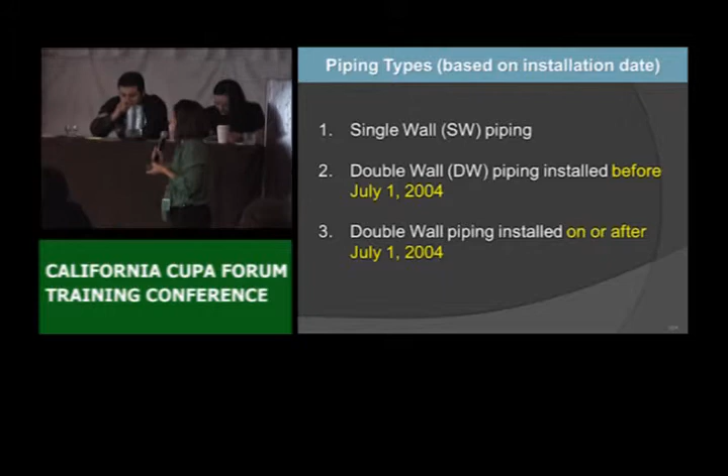Okay, so once again, I based these designations on installation date. So we have your single wall piping. I'll discuss monitoring alternatives and construction with those tanks, I'm sorry, piping. Double wall piping that was installed before July 1st, 2004, and then your double wall piping installed on or after July 1st, 2004. Like I said, when we address the post July 1st, 2004, we're going to be talking about tanks and piping.

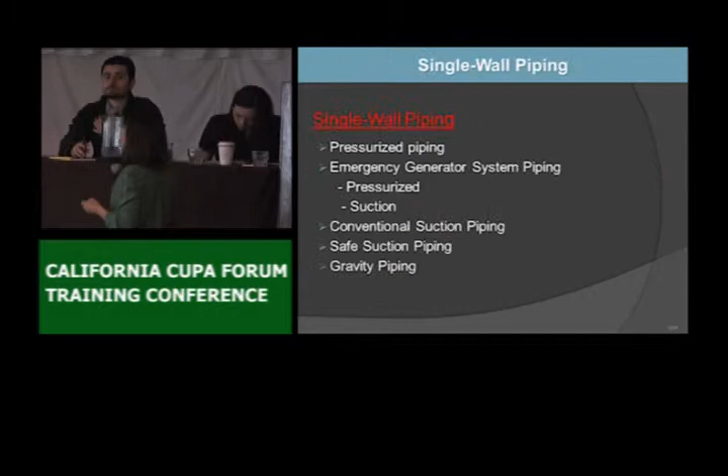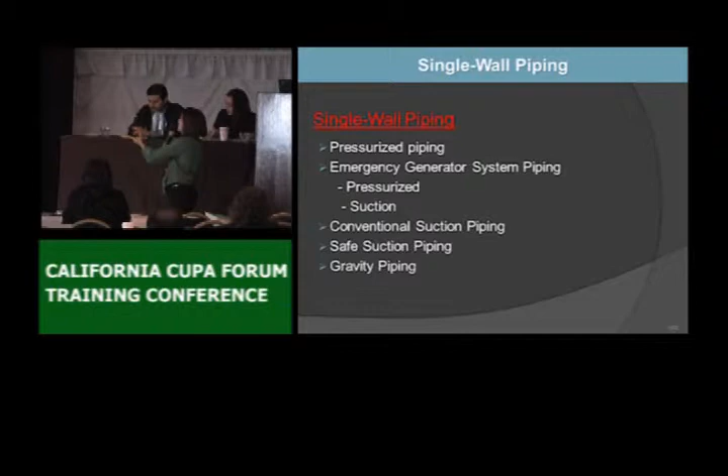So single wall piping, you have your option of pressurized piping, you have your emergency generator system piping, and you have both options of pressurized or a suction system for single wall piping. You have conventional suction piping, safe suction piping, that's not necessarily an emergency generator system, and you also have gravity piping.

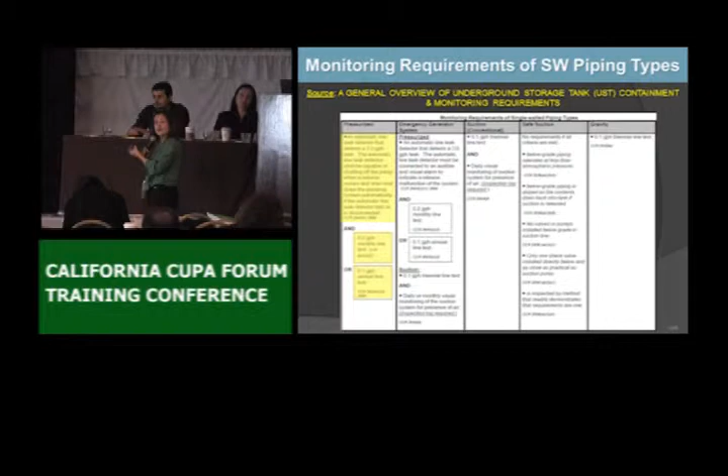I've highlighted these items because within these types of systems, it's going to address automatic line leak detectors. It's also going to address 0.2 gallon per hour monthly line test, or 0.1 gallon per hour annual line test. So I thought I'd define those before we move forward for any of you that are not as familiar with these items.

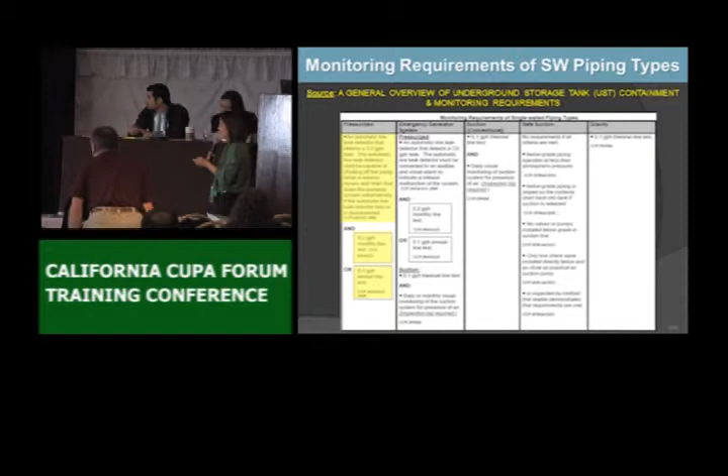Okay, so automatic line leak detectors. They shall be installed on underground pressurized piping and shall be capable of detecting a 3 gallon per hour leak rate, and must either restrict or shut off flow of product through the piping when it detects a leak.

Here we have an example of a mechanical line leak detector, and a mechanical line leak detector is going to restrict, so that meets that requirement. Or you have your option of a PLLD or ELLD, either one, electronic line leak detector, or it's also called a pressurized line leak detector. This type of line leak detector is going to shut off flow of product completely.

So when it restricts, like when they do the functionality test during your inspection, you can actually have them pump fuel, and you'll notice a very obvious decrease in pressure and volume when you have the restriction. If your PLLD is working correctly, you're going to get an alarm at your monitoring panel, and you're not going to be able to pump any fuel whatsoever.

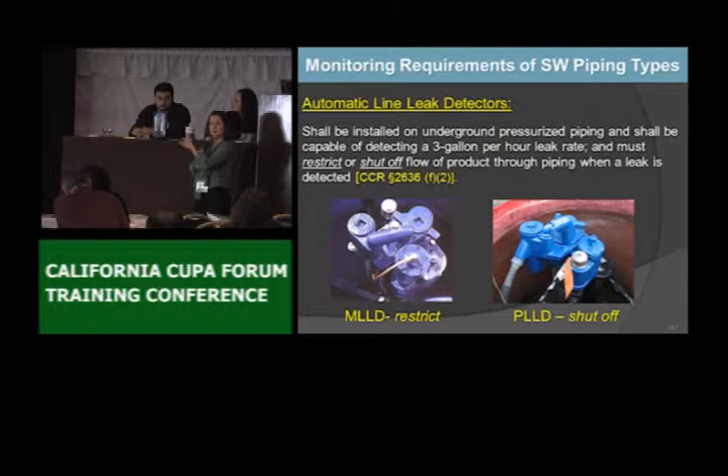Okay, and then all the regs reference the need for a 0.2 gallon per hour monthly line test or 0.1 gallon per hour monthly line test. So I'll tell you what those are, just so we're all familiar.

It needs to be done, the first one, 0.2, it's not as stringent, which is therefore why you need to do it more frequently, and that shall be done at least monthly at any pressure. The monitoring method shall be capable of detecting a minimum release equivalent to 0.2 gallon per hour leak rate, defined at normal operating pressure.

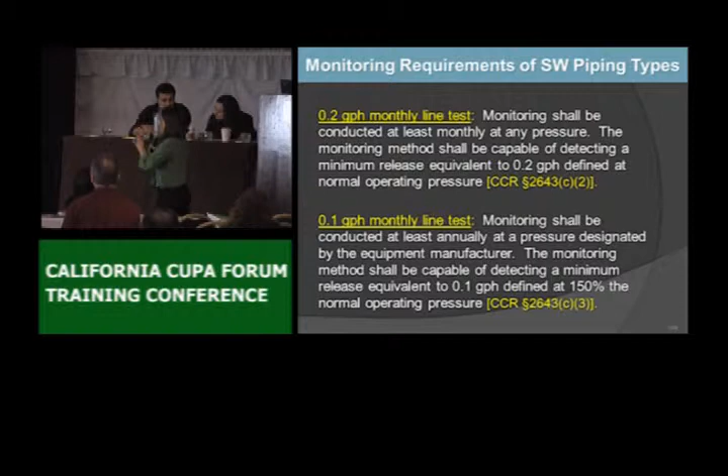0.1, that's going to be more stringent, but yet less frequent. So the leak rate is equivalent to 0.1 gallon per hour. Like I said, that's going to be done annually, and that can be done at a pressure that's designated by the equipment manufacturer. And like with anything with USTs, a lot of times when we have any questions or doubt, we often turn to manufacturers' recommendations. Ultimately, they're going to know what's best for their product.

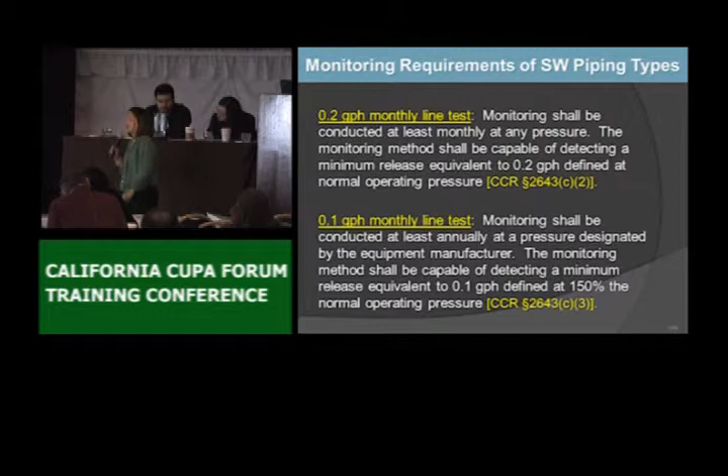So let's see, this method shall be capable of detecting, like I said, that 0.1 gallon per hour leak at 150% the normal operating pressure. Okay, so I had that schematic, which you all have a copy of too, and I'm going to go bit by bit so each one is clear.

The first subcategory would be the requirements for pressurized piping. And don't forget, until I tell you otherwise, we're going to be addressing strictly single wall piping, okay? So with single wall piping, you're required to have an automatic line leak detector. Don't forget, it needs to detect that 3.0 gallon per hour leak.

The automatic line leak detector shall be capable of shutting off the pump when a release occurs and shall shut down the pumping system automatically, also if it fails or is disconnected. So if it needs to shut off the pumping of product completely, what is your option? Can you use a mechanical line leak detector? No, because that's simply going to restrict flow.

So single wall pressurized piping, you're forced to use a pressurized line leak detector. In addition to that line leak detector, you're going to need either a 0.2 monthly or a 0.1 annually. So overall, you have two requirements: line leak detector and a line test, whether it be monthly or annually.

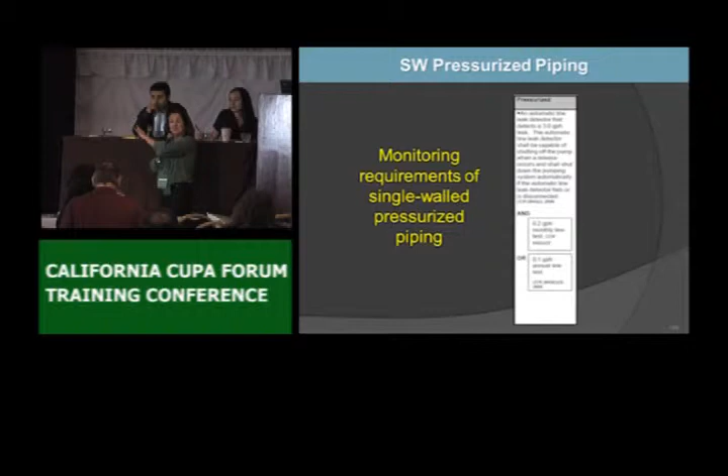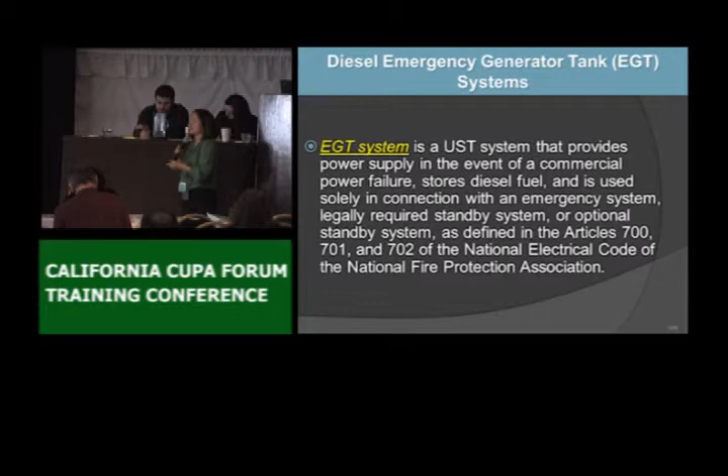Okay, so you need to meet this definition in order to qualify for the monitoring requirements for the emergency generator single wall line requirements. And here they are, I'll go into detail. Also within the emergency generator category, you can have emergency generator piping that's pressurized, and you can also have emergency generator piping that's suction. I've seen both, but let's talk about the pressurized one first.

So you're going to need to have an automatic line leak detector that detects a 3.0 gallon per hour leak. Okay? Don't forget this is pressurized, but the difference between a pressurized emergency generator line versus, for example, a retail site: the line leak detector only needs to be connected to an audible visual alarm.

It doesn't require a positive shutoff. Why do you think that is? You probably don't want your fuel supply being cut off during an emergency. So it still requires that stringency of a line leak detector, so you have your continuous monitoring, but you're able to use a mechanical line leak detector as your option.

So just like the previous pressurized systems, you're going to need either a 0.2 monthly or a 0.1 annual line test. So line leak detector and line test.

And then you have the option of having a suction system that's also in conjunction with your emergency generator tank system. Okay, and with a suction system, and I'll go into some detail about suction systems in the next couple slides, but you're going to need a 0.1 gallon per hour line test, and that only needs to be done every 3 years. And then you're also going to need to keep a log of daily or monthly visual monitoring.

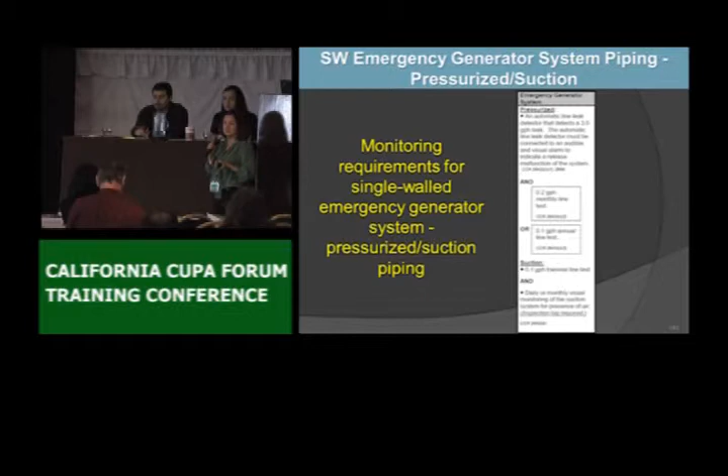And what you're looking for is any air in the line in the suction systems. So you don't necessarily have to have any equipment with this suction piping. You could have a line leak detector for the sole purpose of doing a line test, or you can just every 3 years have a contractor who's certified come in and do a third-party line test every 3 years.

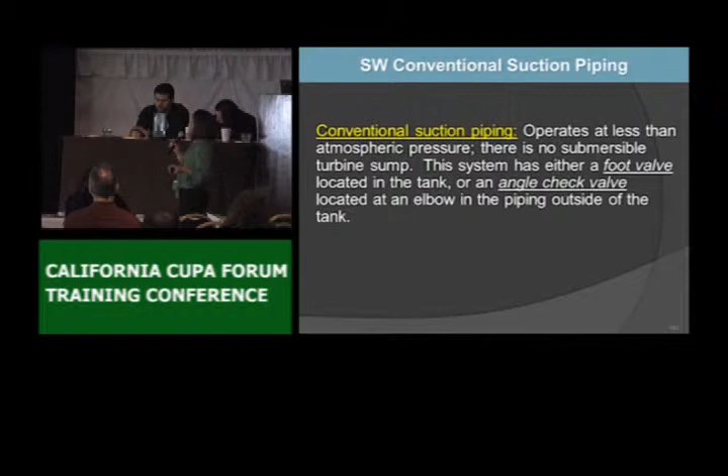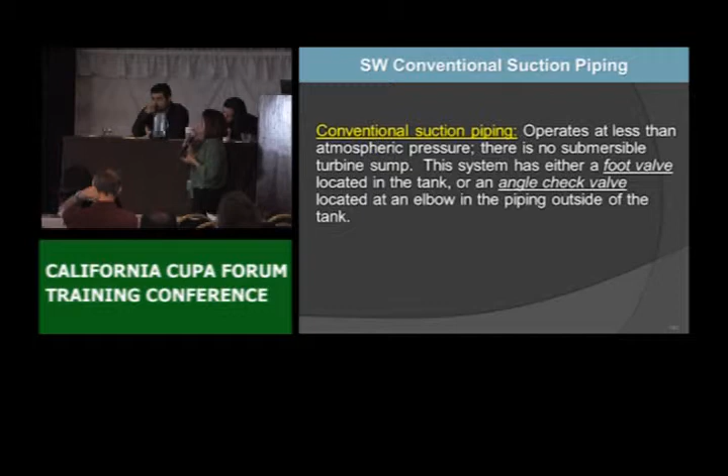So like I said, I'm going to discuss some suction piping. You have conventional suction systems, and you also have safe suction systems, which I'll talk about in detail in just a minute. But for conventional, it's going to operate at less than atmospheric pressure, and there's no submersible turbine sump, okay? And this system has either a foot valve, located in the tank, or an angle check valve, which is located at an elbow in the piping outside of the tank.

And I have a visual to show you this. So the top little red circle is going to show you the angle check valve, and like I mentioned, it's outside of the tank, whereas the foot valve is in the piping within the tank.

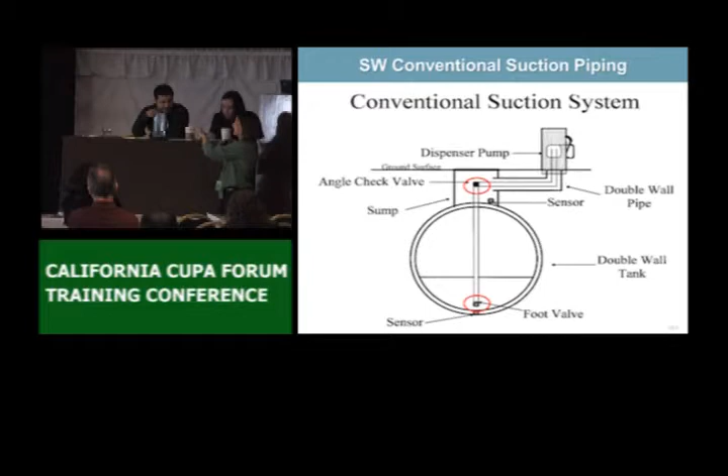Okay, monitoring requirements of single wall conventional suction piping: every 3 years, they're also going to need the 0.1 and the daily visual monitoring of the system looking for air in the line. So single wall conventional suction has identical requirements as a suction system for an emergency generator tank system.

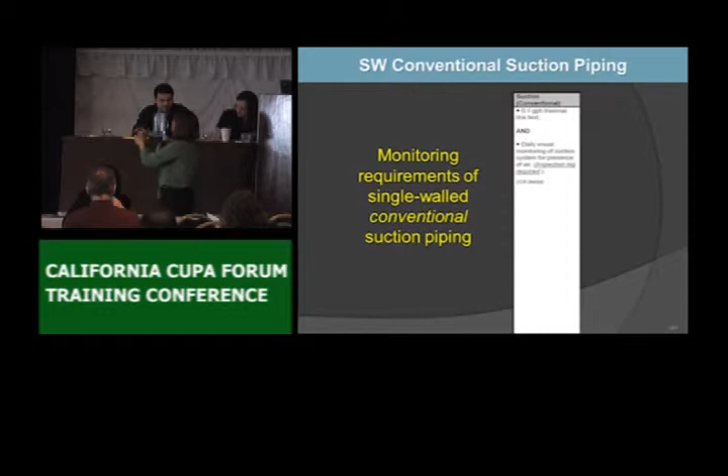Okay, and what are you looking for? Daily, you're looking for the presence of air in the line, because that's going to indicate a problem or perhaps a breach in the line.

Here are some indicators of air in the line. Your display wheels on the meter will skip or jump during operation, so it's not flowing evenly. You might find that the suction pump is operating but not pumping fuel, or it pumps fuel very sporadically—fast in the beginning, then slowing down as it begins to pull liquid. Or you might hear a rattling sound in the suction pump, which is never a good thing to hear. That's also going to indicate some sort of air and liquid mixture.

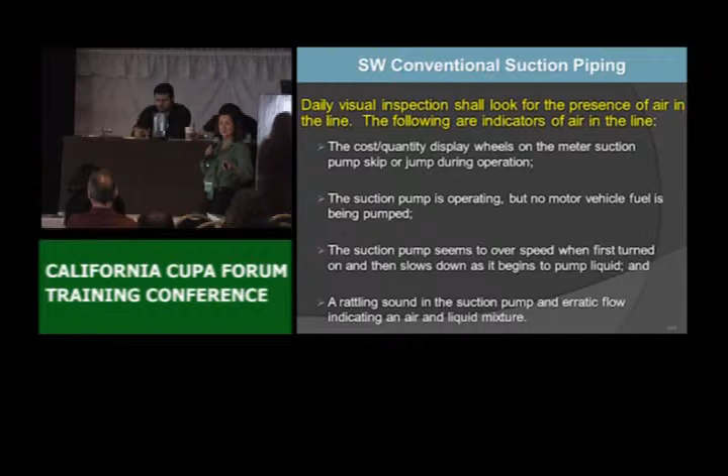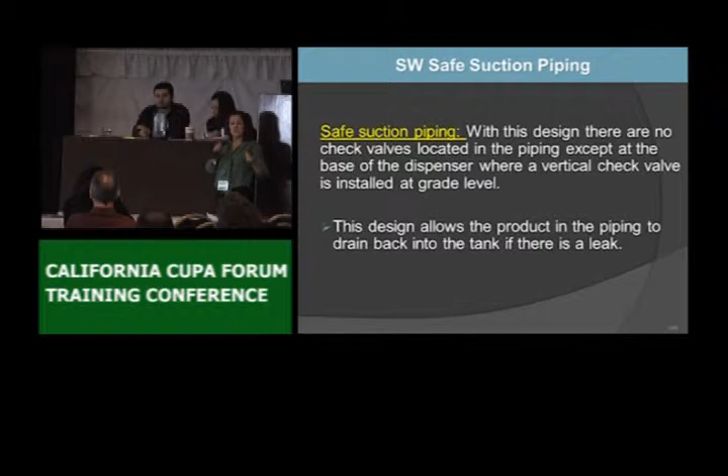So that was conventional suction. Safe suction piping is a little bit different, because with this design, there's no foot valve, there's no check valve, there's nothing to keep fuel in the line. That's the big difference—that's why, when I get to the monitoring requirements, it's less stringent. It seems to be risk-based: the conventional system has foot valves and check valves that maintain fuel in the line. With no check valves, the fuel always drains back to the tank—it's never caught behind these valves. So if there's a leak, it always drains back into the tank, and it's less risky.

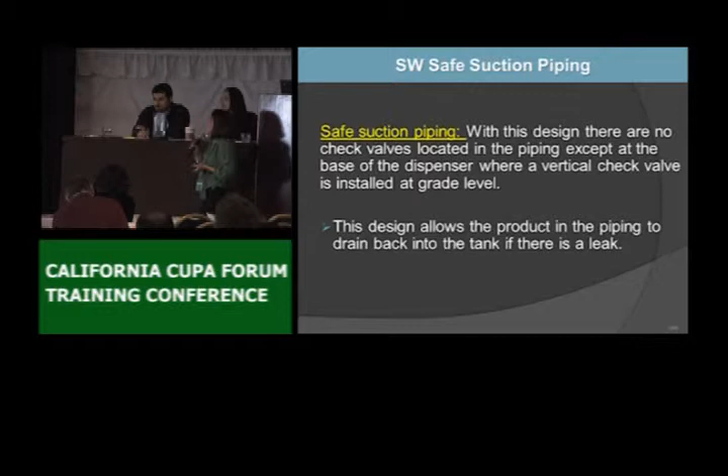And here's a visual. You're going to have your check valve closest to the dispenser. It's not even below grade, not near the tank, and you can see that there's free access for anything to drain back into the tank.

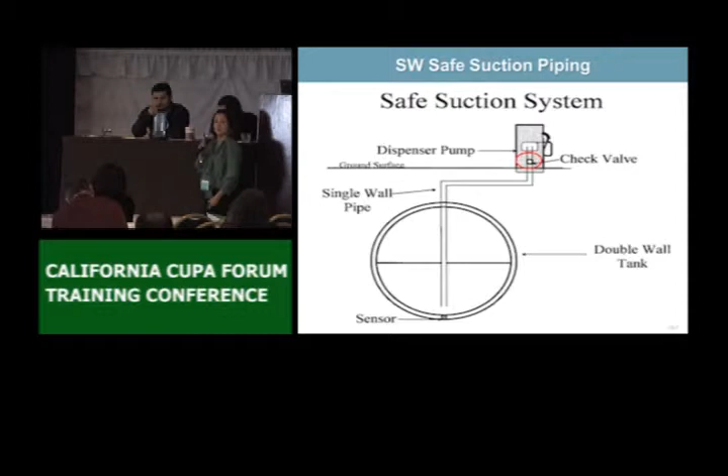So monitoring requirements—really no requirements. I mean, safe suction is probably the safest type of system you can have. But of course, you want to make sure that your criteria is always being met to be considered a safe suction, so you also want to be operating at less than atmospheric pressure.

Your piping is sloped, so that's going to fall back to the tank, and it's not going to be tripped up by any valves or pumps that are below grade. If you do have a check valve, it's going to be directly below and as close as practical to the suction pump, generally right at the dispenser area near where the shear valve would be. Then you want to do inspections to make sure these requirements are being met. I don't think there's any sort of log requirement, but just for your own sake, to maintain your criteria.

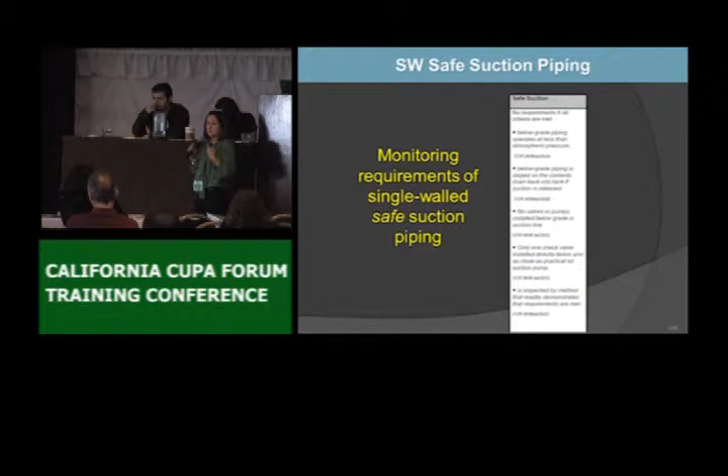Okay, how do you know if you have a safe suction or conventional suction system? You might look in the sump and see the same types of piping and configuration. But if you want to verify safe suction, you're going to loosen that access plug just below the shear valve, which is, I believe, the same place where you might tie in to do certification of your leak detector.

Line leak detector. You're going to listen for a sucking sound. If you hear this sound, it indicates that product is draining back into the tank and that there's no valve present in the line blocking that flow. However, if you remove that access plug and product is sitting right there and starts seeping from that access point, you know you have a conventional suction system, because it does not drain back to the tank.

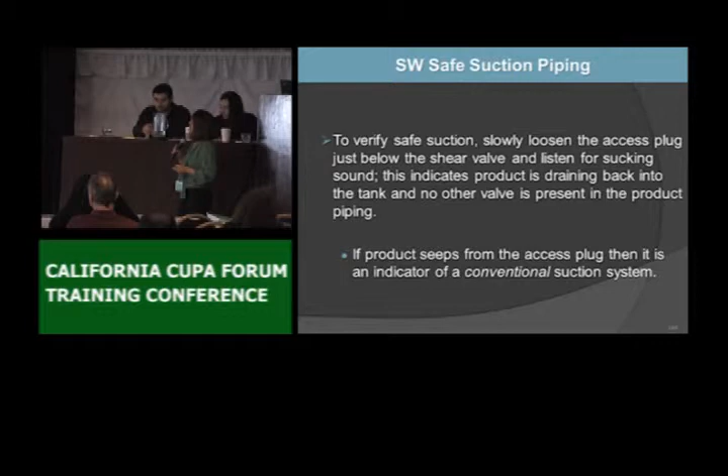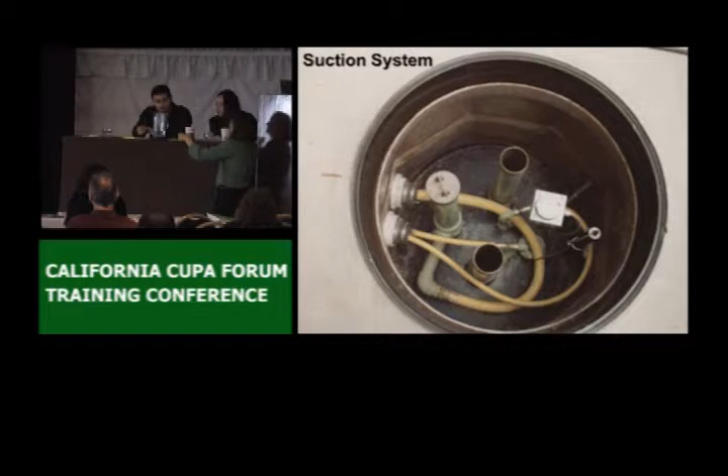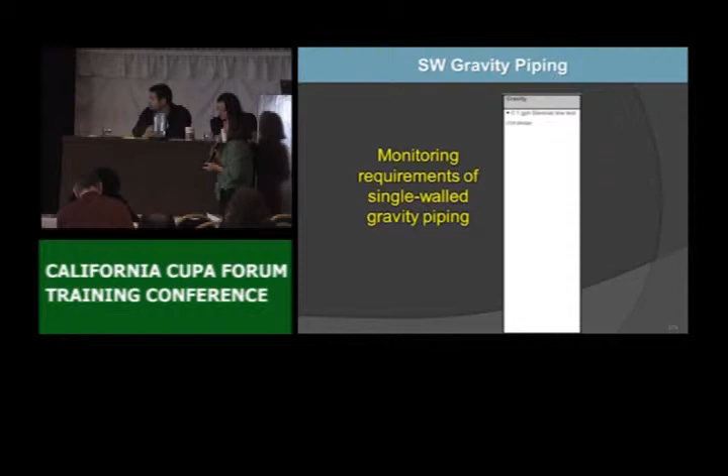Okay, and last but not least, you have your single wall gravity piping. The only requirement is you're going to need a 0.1 gallon per hour biennial line test—biennial meaning every 2 years. Okay, any questions on single wall piping?

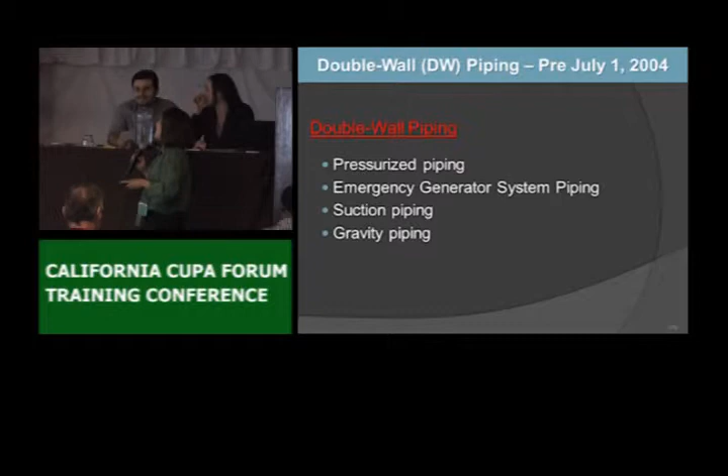Okay, so I'm going to get started back on double wall piping. This is one of the more common things that we see in the field, so I did want to save this for after lunch so we could spend a little bit more time on this and not rush through.

Similar to single wall piping, I've broken it down into sections to address each type individually, just to make it a little bit easier. Our sections include pressurized piping, double wall piping associated with an emergency generator system, suction piping, and gravity piping.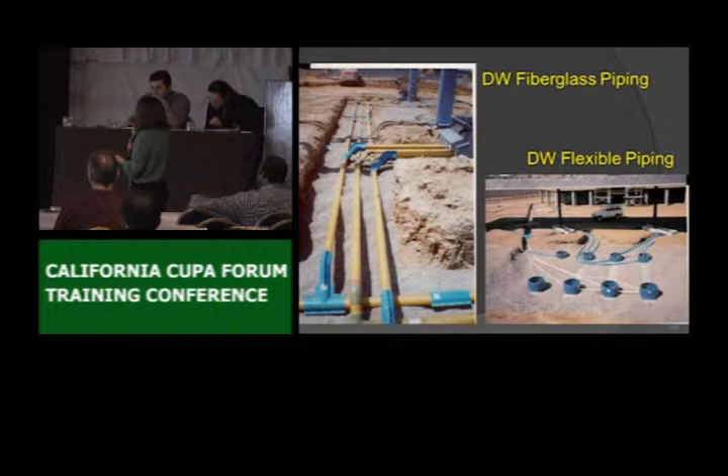Here's just a close-up of how secondary piping will look in the sump. You have your piping penetration up at the top there, so you're going to have your double wall portion of the pipe and single wall come through that penetration. And then this 3-inch pipe is going to be the secondary containment for the primary piping, which is usually a 2-inch in this type of application.

And then Zoraida will discuss secondary containment testing a little bit later. However, this test reducer boot is what gets pushed back onto this portion of the secondary pipe, which will help you isolate that secondary line when you do that test. And when you're not doing the test, this boot needs to be pulled back to allow access of any leaks to come through that secondary pipe.

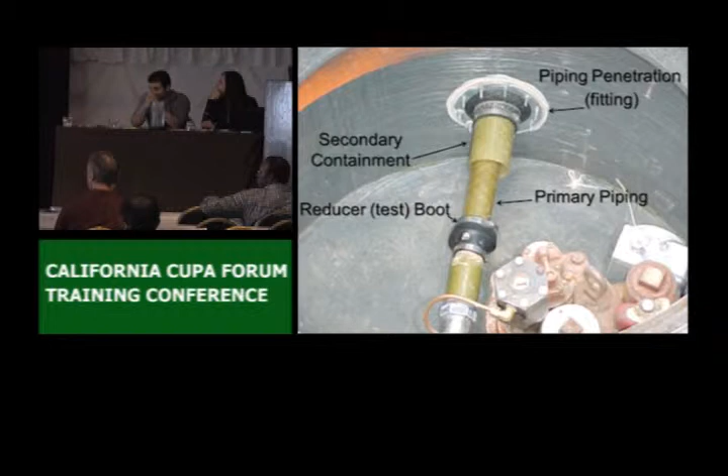Does it have to be pulled back in the UDC instances? They should be - it's not the low point, but we request that they are. He asked, do the test boots need to be pulled back in the UDCs? I think it depends on the type of pipe, if possible. What do you guys see in the field? Oh, is it not? Sorry, I haven't been in the field in 4 years, so apparently it's not always pulled back. So I think the reason is because if it's pulled back at one point, which is either the sump, it leaks back into the sump.

But I'm going to actually disagree with that, only because we've had situations where the flex piping still needs to drain into that sump, the UDC. Because if everything goes back to the tank sump, then you're not catching it at the earliest opportunity. Because some of the contractors are selling it to us like that - that it's okay to be on the UDC as long as it's not in the sump. So they're longer, and contractors are doing that.

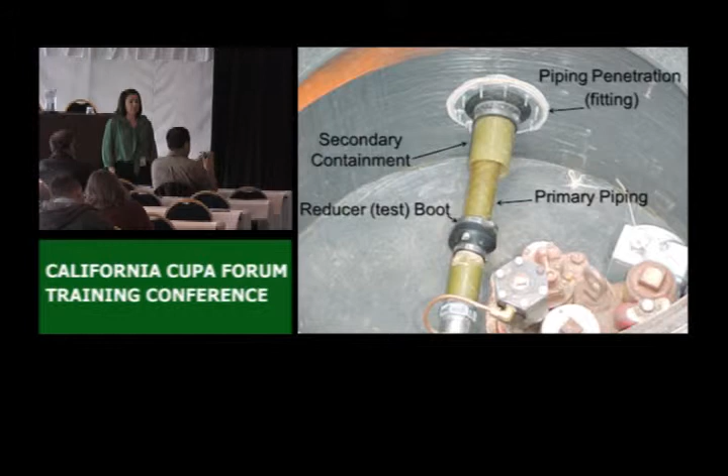My question is again, if we leave it on at the UDC, should that be okay? And it's not going to be a violation to you guys when you go out there and look at our sumps and UDCs? I would say that depends.

It is a gray area. And I think if an inspector marked it as a violation, they would be in their right because of that portion of the regs that talks about detecting a leak at the earliest opportunity. However, I don't know that everybody would necessarily mark that as a violation, at least for fiberglass piping.

But you're right, that's why people do that—because you don't have the access as easily, and oftentimes you have to take the dispensers off to reach those boots, and it does become costly.

In the same scenario, we came up with a compromise with another company where they weren't able to keep a loop to keep it connected with jumper tubes, but they could have extender tubes that could reach up and above grade so they could access it that way, without keeping anything like a Schrader valve on the end. So it's still isolating the dispenser and it's still going to deposit any leak in that dispenser, but it still allows accessibility for the testing contractor when they need it.

But if a CUPA gives a violation, I think they have a leg to stand on, but I don't think every CUPA is going to look at that. This becomes more of the noticeable issue, at least.

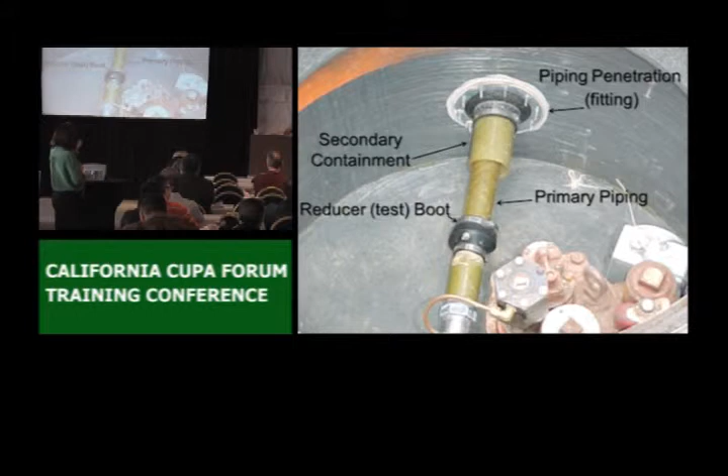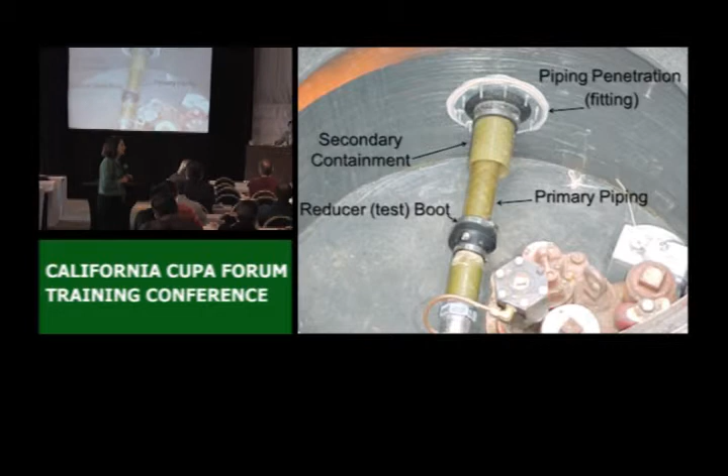That is true, and a lot of ours we pull back after testing because the test boot isn't really part of the system, but that's a whole other issue. We could argue this back and forth. What we do with ours on the generator, we pull them back after we test them and they're open. But the ones that are hard to get to, we take that Schrader valve that sits on the bottom and take it out, so it's at its lowest point.

And you guys have seen that Environ piping where the coupling stays on sometimes within the sump, and then they have the tubes coming out. As long as that Schrader valve—and I'm speaking from how we do it in San Diego, and it might even differ between inspectors—at times if that tubing's left on for the Environ piping, and you can verify there's no Schrader valve or ball valve at the end of that small line, that's not necessarily a problem either. The thing with flex piping, and why it's not as much of an issue as leaving something like this on the fiberglass, is that the secondary interstice of a flex pipe is so small that any leak, in theory, is going to be shot out just because of the pressure, since that interstice is so small. So having that tube is not going to necessarily cause any more delay in finding that leak. That was our rationale in San Diego.

Any more comments or stories from other folks about this? No? Okay.

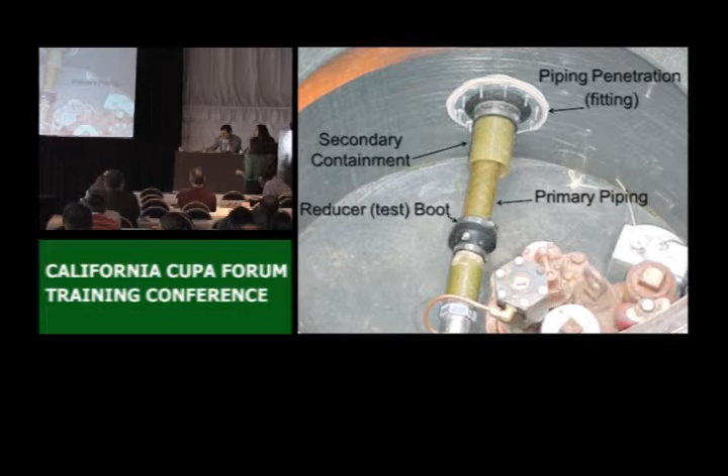So this is how a typical sump might look. There should be a sensor right over there as well, so imagine that's there at the low point. And by low point in a sump, you want the sensor on the side that the piping is actually going to exit the secondary pipe.

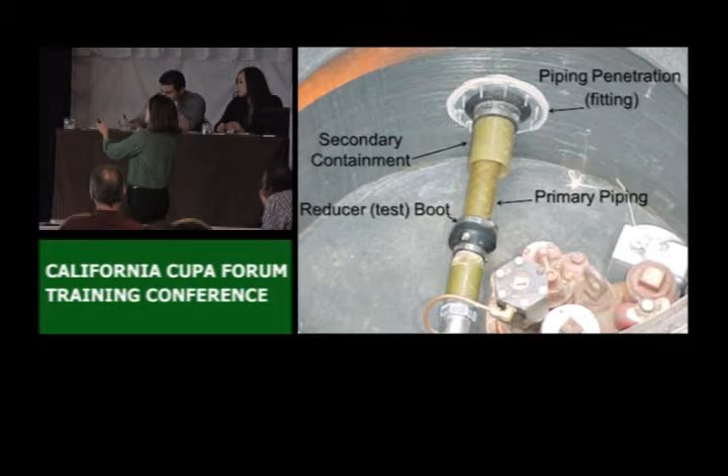Just to show you a basic system, and the next slide has a little schematic of what happens when there actually is a leak. So you have your double wall tank, and then there's your secondary pipe, and you can see the penetration goes into that sump, and you have the simulated leak from the primary.

So the purpose of that secondary pipe is not only to protect the backfill from the leak, but also to act as a conduit for that leak to go into the sump, which is why you have the sump sensors. So the sump sensors serve two purposes: they're monitoring any leaks within that sump, such as a leak from the turbine or a leak from that primary part of the line—often we call it the primary transition pipe.

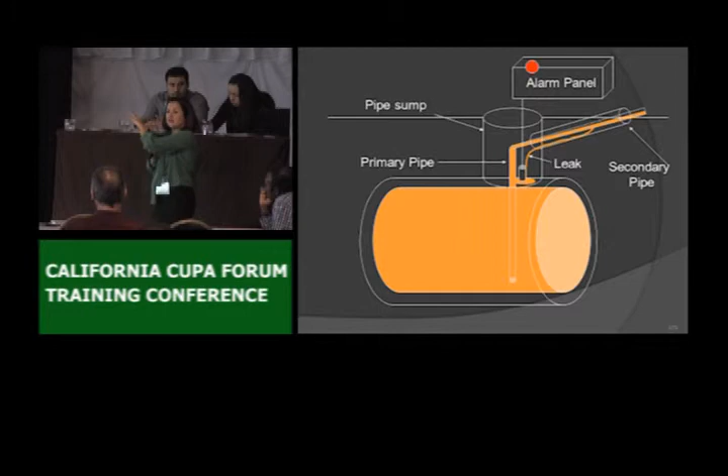But it's also monitoring any leak you find throughout the whole piping run. As you can see, at installation you're verifying that piping is sloped down to the tank pad, so any leak along that run is going to fall to the tank sumps.

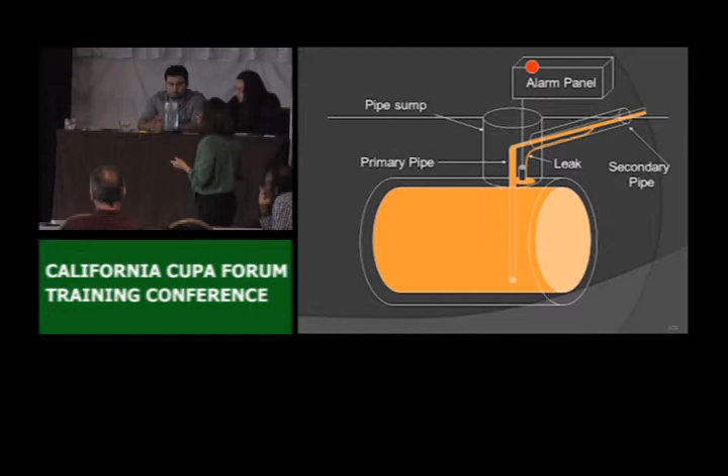So probably the most common scenario you see is double wall pressurized piping, and once again, this is before July 1st, '04. Post July '04 is going to be a whole other story.